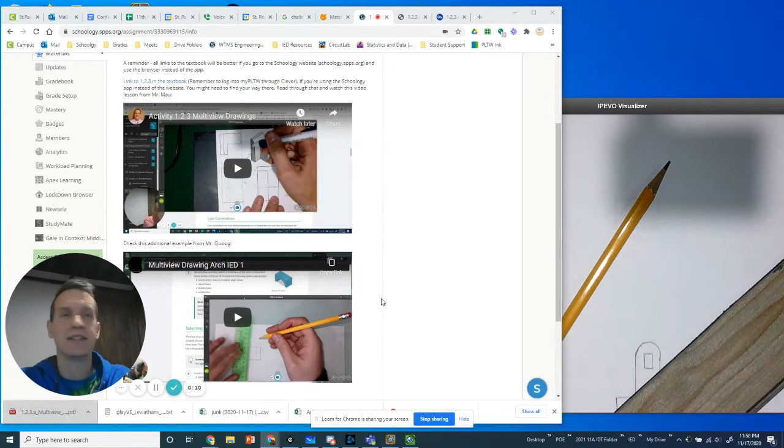I wanted to give some tips on these multi-view drawings. I recorded this video twice already, and the first time I screwed up, the second time it was 9 minutes, and you don't want to watch that, so I'm going to try to do this a little more quickly here.

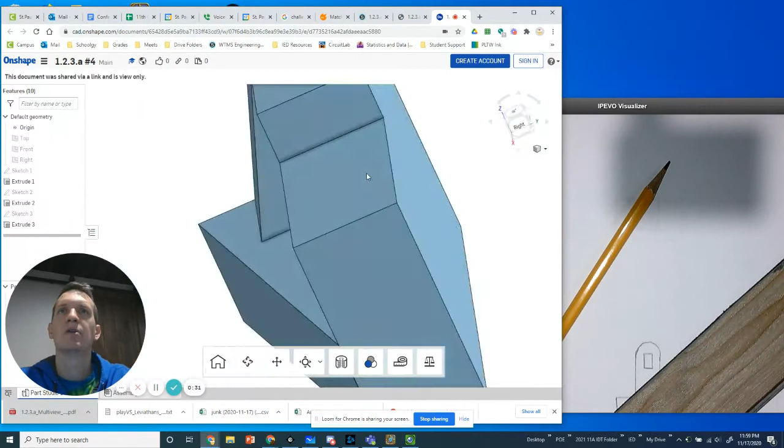Looking at the assignment, just a few things I want to point out. This problem here, I did it in Onshape, so you can use the view cube to look at different sides, spin this thing around, and help see what those multi-view drawings should look like.

All this stuff here is great practice. It's like exercise for your brain. Your brains are just at the age where your 3D thinking, your spatial reasoning, is really starting to turn on. So think of this like exercise for your brain—it's going to make it stronger. This stuff takes practice, it takes time. Unless you have a very mathematical mind, it probably isn't going to click right away, and that's okay. Just keep doing it, keep practicing. I don't care how good your drawings and work look—I just want you to be practicing and thinking about this stuff.

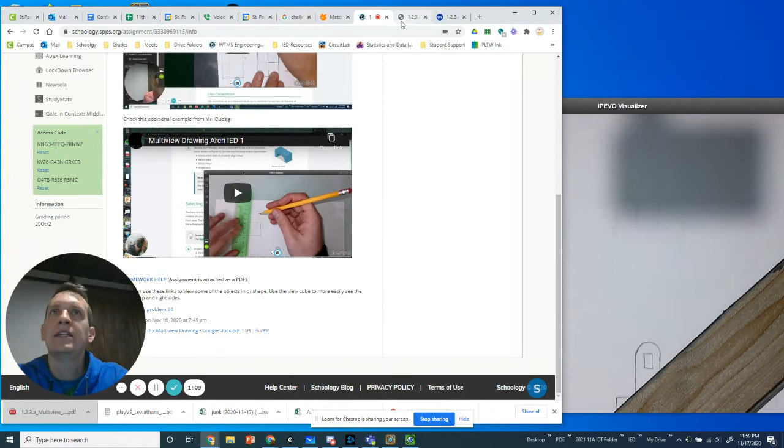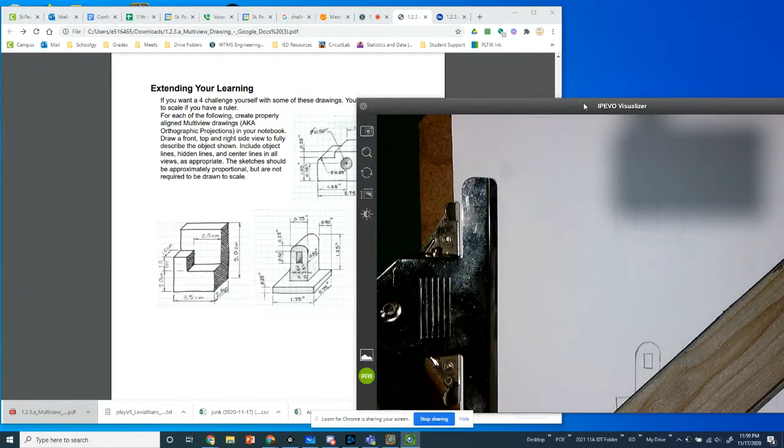So let's take a look at one of these drawings where you've got to make the multi-view drawings, the 3 views for these shapes. I'm just using a piece of flooring I had laying around from finishing my basement as my ruler. You could make a scale drawing and get all these measurements exactly correct, or we could just draw them by hand and take our best guesses.

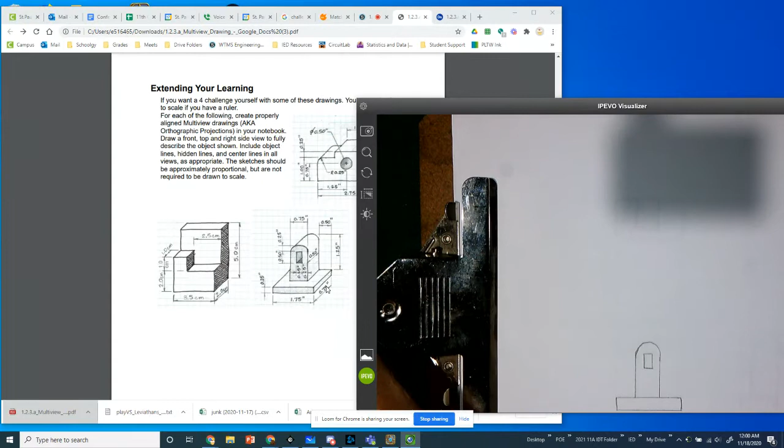Notice this drawing is weirdly stretched out, because if this line is 0.75 inches and this line is 1.75 inches, they look the same length, but by these measurements this line is over twice as long as this one. So keep that in mind while I'm doing my drawing here.

To save time, I started with the front view, so I already did that—I just looked at it and did my best there. Now I'm going to use my ruler, my scrap piece of flooring, to draw my extension lines. So anything that is horizontal, I'm going to just draw over here. These are light lines, called construction lines.

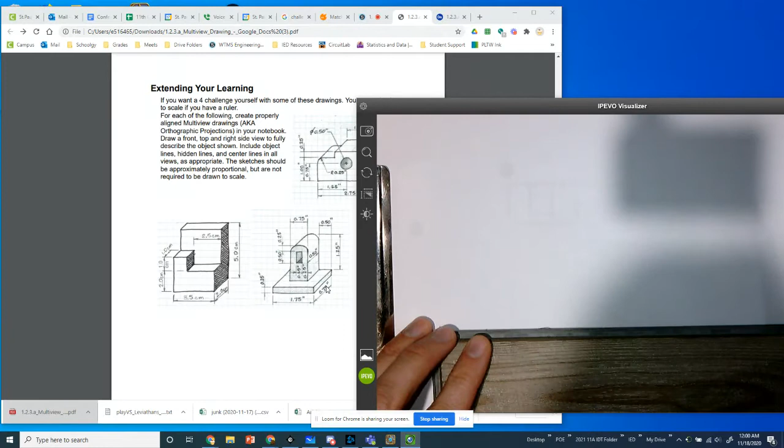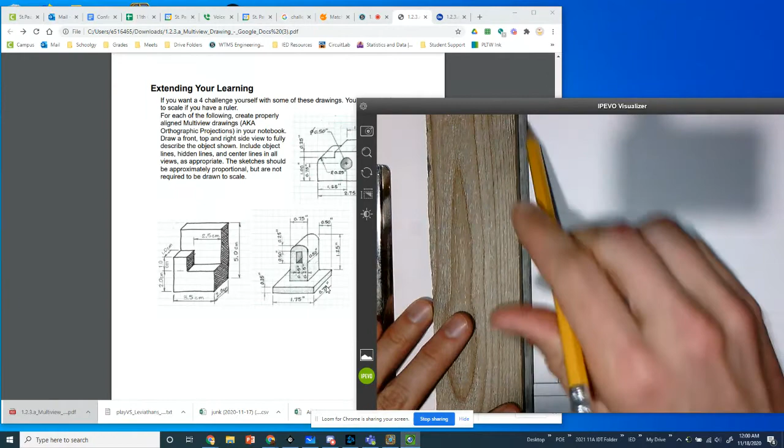And the top, we'll bring that over, same thing, so this is going to help me build my side view. And then my top view is going to be helped by stretching up any of these vertical lines here.

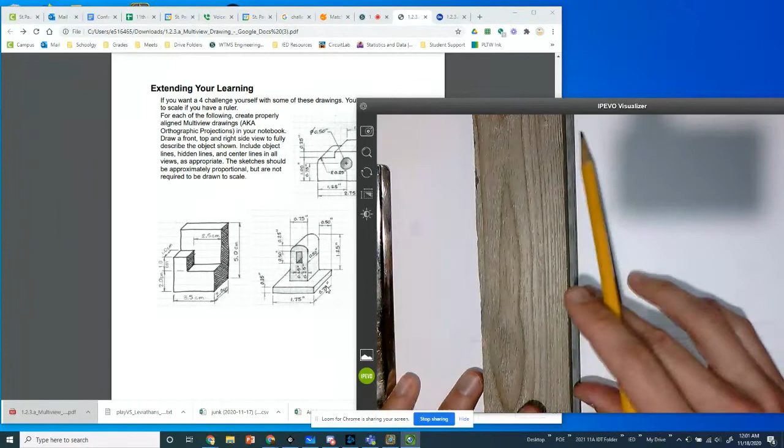If I were doing this for professional engineering, a real drawing, I would make sure my angles are all at 90 degrees, but close enough, right? This is just practice. Okay, so I'm going to go to my side next.

Remember, this is the front, and then the side always goes to the right. So front here, side here, top above—that's the order we're always going to do this. So I'm going to use these lines to make that skinny piece.

Like I said, this is going to look shorter than it does in the drawing, because according to the measurements this line is over twice as long. So there's that bottom piece. Notice these line up from the front to the side—that's why we put the side directly to the right of it, because as tall as this is, it should be the same height here. So that's how those construction lines help me out.

And then I know it's going to go all the way up to this one here. We'll just guesstimate that, since this thing is 0.5 inches back, it should go about 2/3 of the way. So I'm just going to guess right about here.

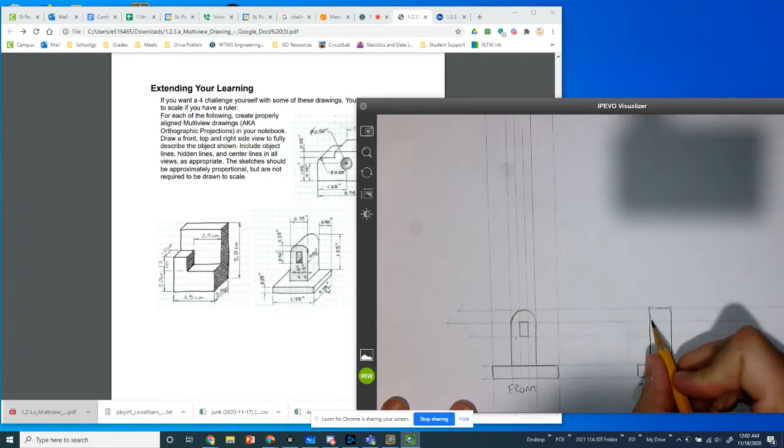And there's our side view. That's what we see if we look at this from the side. For those of you keeping track at home, you're like, wait, what about these lines here from this hole? Well, those you can't see from the side.

So this is called a hidden line. Imagine you have X-ray vision. That is the dashed line here that tells the person manufacturing this or looking at it, hey, there's something here hidden you can't see. Go look at another view so you understand it. So you see this, you go look at the front view and think, oh, that's a hole, I get it now.

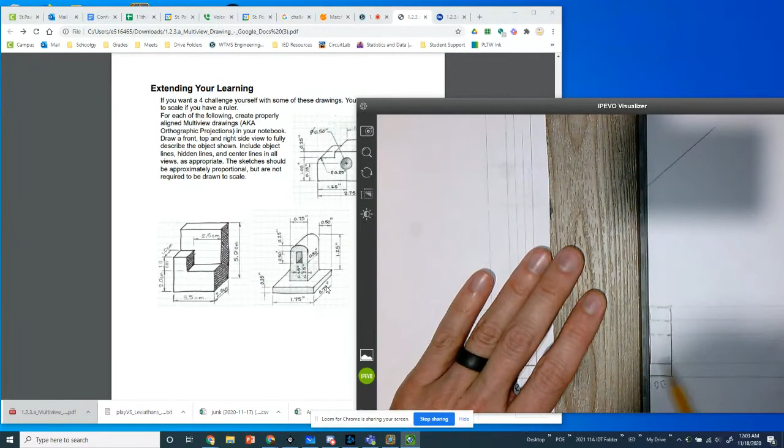Okay, there is a trick you can do, and you don't have to do it this way. If you make a 45-degree line - I don't know how close that actually is to 45 degrees - you can bounce your lines from the side view over to the top view. You don't have to do this. We could have just kind of guessed some of ours, but I just want to show how this works.

So if you think about it, you kind of hit this and they go up like a mirror. And this is nice when you do all this work, because then you don't really have to think on the top drawing.

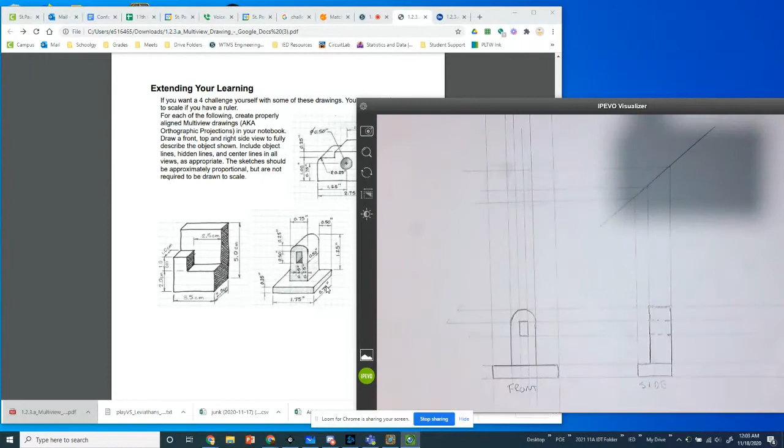Okay, if you imagine viewing something from the side, right? Like if you look at me from the side, from front to back, well, if you looked at me from the top, that distance is the same. That's why these lines carry over like that.

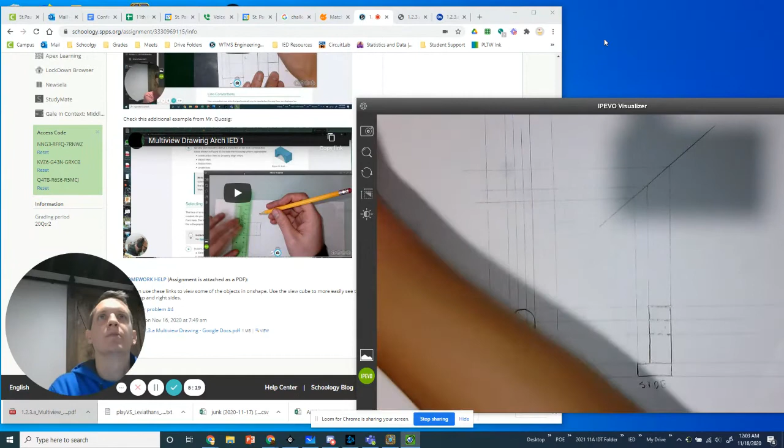So the distance from the front to back here, if I follow this, looking down from the top is going to be the same. So what do we see from the side here? We see, well, this defines the whole base of this thing here, looking down on it. This is why I said having all these lines is nice, because you don't have to think.

I can't, let me get the window up here. I can't draw a straight line to save my life. This is bad.

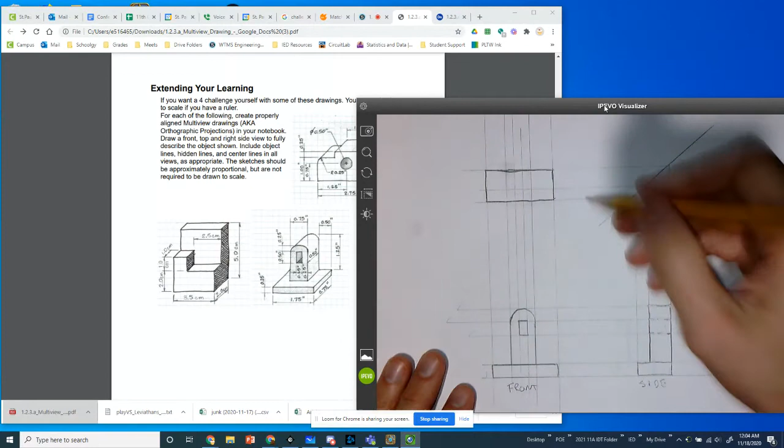Okay, and then we've got this piece here. It's that piece that sticks up, and it looks perfectly flat from the top. You can't tell how far it sticks up. And then this is, again, a hidden line because that is a hole that we can't see through it.

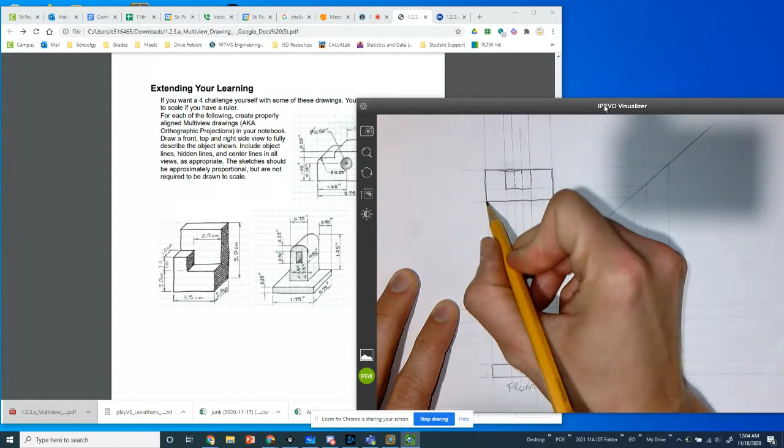So there you go. To finish this drawing, I'm not going to make you watch that, but I would go through and darken up all my object lines so the drawing kind of pops and these construction lines all melt away. Don't erase any construction lines. They show how you built the piece. They show how you got your information.

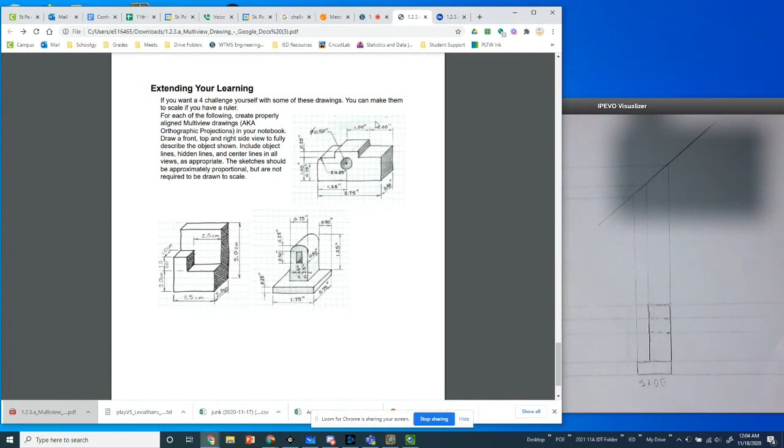This is the full way to do this and get this more precisely correct. You could, if you're working on just visualizing, imagine the front, the side, the top, and kind of freehand those as well. You don't have to go all out for every drawing, but I do want to show how that works because that helps you understand how these drawings are made.